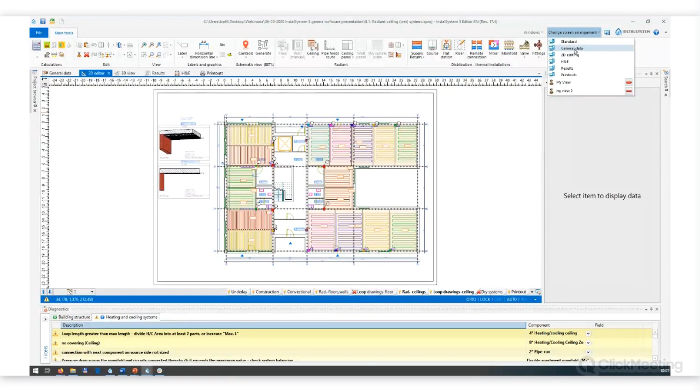To improve comfort and efficiency of your work, you can quickly change the configuration of windows visible on the screen. Now we can see some standard configuration. If you choose any other of them, you will see a different configuration. Now we can see general data, then we can switch to 2D editing. You will see a 2D view and also a 3D view. Next, for example, results. The list of predefined configurations corresponds to subsequent stages of project implementation.

You may use one of these configurations, but you may also create your own. Let's change one of these configurations and save it. I will close the data table, and I will move the 3D view to the right side of the screen, like this. Now I will save it by clicking on this button. Name it 2D and 3D view. And it's been saved here in the list of my compositions.

Okay, so let's take a look now at the top of the screen. You can see the ribbon with many icons. When I switch from one edit scope to another one, the contents of the ribbon adapts to the currently edited project scope.

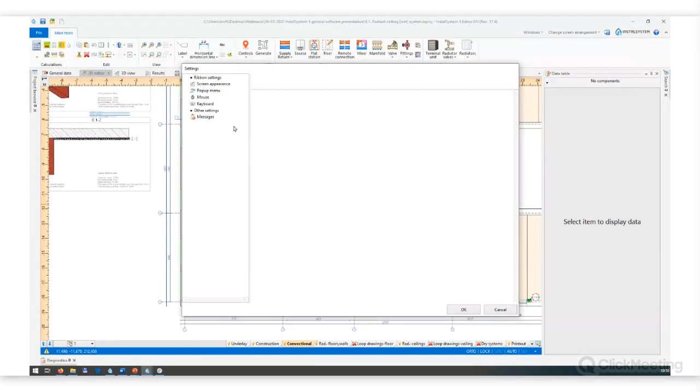Okay, the next feature: all the windows are interactively linked. When you browse something, let's change the configuration. And when you click on some of the elements with the right mouse button, there will be a function find in active windows.

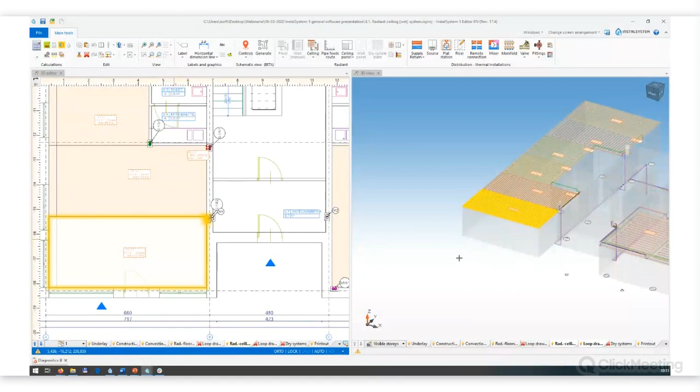It's very useful at different stages of project implementation. When you analyze the diagnostic messages and you want to find the element in a 2D or 3D view. When you analyze also the results, or you want to just find an element from the 2D view on the 3D view.

That's all at the beginning about the interface. We'll use the program in practice training a little bit later. So let's go to the next point.

Integration of all modules in one application. Now I will use another example with flat stations. This one. And show you also a short page. Sorry, not this one. This one. Okay.

If you know version 4, you surely know that there we had different applications: Install Heat and Energy, which was for heat loss calculations. We had InstalTherm HCR for heating and cooling installations. We had InstalSan for tap water and sewage systems. And we had Install Mat for processing the list of materials.

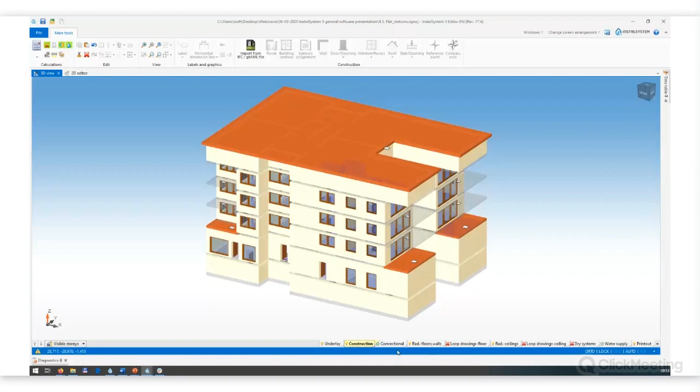First of all, you can make in one project all the installations without the necessity of switching between different programs. It saves time at many stages of project implementation. For example, it eliminates double import of underlay, or double creation of building structure, or double preparation of printouts.

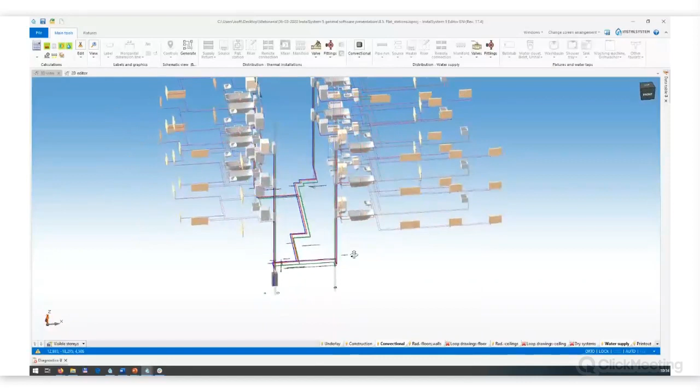Also, you can quite easily find the collisions between the installations, because you have full control of the model of the installation on 2D and 3D view. And also, because of the integration of all modules, we could introduce flat stations into the program. About flat stations, I will tell you more in the second part of today's meeting. Okay, so let's go to the next point.

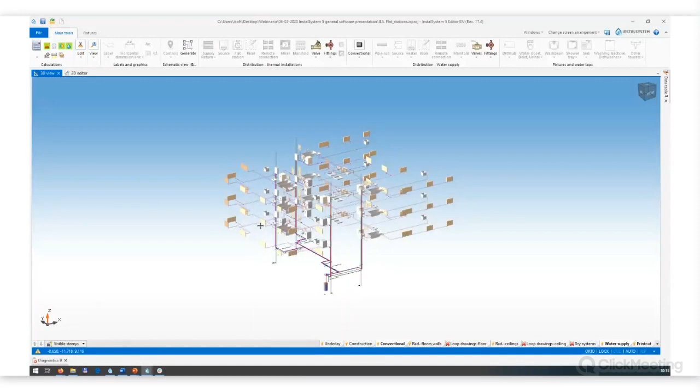3D view for better control of the building model and installation model. Once again, we are in the same project. Generally, in version 5, similarly to version 4, we create the installation on plan views. So we create an appropriate number of levels, and then we draw the installation.

But additionally, we have a 3D view, and it gives us a great tool for diagnosis and control of the model of the installation. With the use of available functions, you may flexibly control the scope presented on the 3D view. For example, we may hide some stories. Let's leave just one. We may also hide all walls. On the right mouse button, there is a function: hide all walls in 3D view.

Or we may hide just some walls, not all of them, just to look inside some room. And we can also precisely control the scope of presented installations. Let me display once again the whole building.

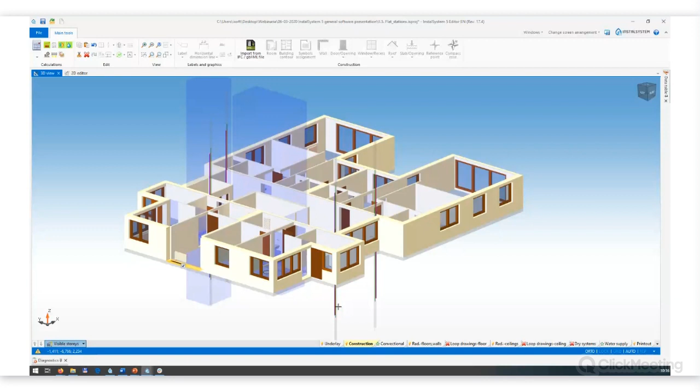And now when I switch to convectional, for example, you will see just the radiators, the flat stations, risers, so the heating installation. When I click to water supply system, you will see hot and cold water installation.

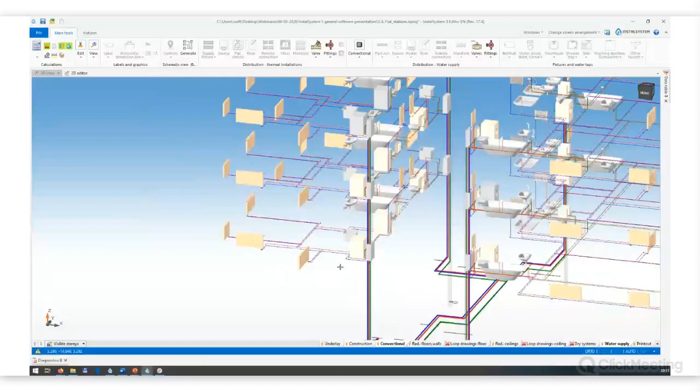I may also select by holding Control key and clicking with mouse on two scopes. I may display, like in this case, heating installation, hot and cold water installation at the same time. Okay, so it's the 3D view. Another point.

Rearrangement and optimization of general data window. We may use the same project file, and let's open the general data. Okay. All the tabs have been rearranged and optimized. All the project and calculation options have been combined and grouped into these intuitive tabs.

A list of visible tabs in the general data depends on the project scope. So depending what applications are switched on, we can see different contents of the tree in the general data. Maybe let's take a look on the thermal systems and ceiling systems, one of the examples. You can see that this tab has been divided into structural parameters and operating parameters.

So if you change anything from this data part, you may expect that they will somehow affect the change of the construction of the ceiling system. If you change anything from operating parameters, you may expect change in the flows, in the pressure drop, so generally in the operating parameters.

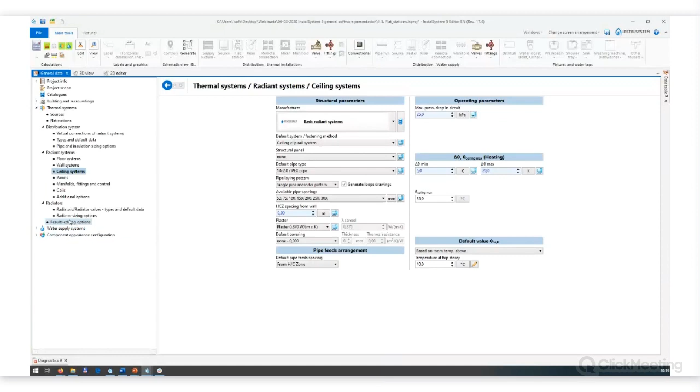When we click to radiators, you will find their default radiator type, connection, fittings. So all the settings associated with the radiators were grouped on one tab.

Another feature is the possibility to display in many places additional graphical and text information about the products. When you select the system or some element of the installation, you may take a look on it. If there is additional information available on the web page of the producer, you may also display that information. This is link to the website.

And the pictures may be also displayed in the bill of materials. So when you print the bill of materials, it may include also the pictures and some additional text.

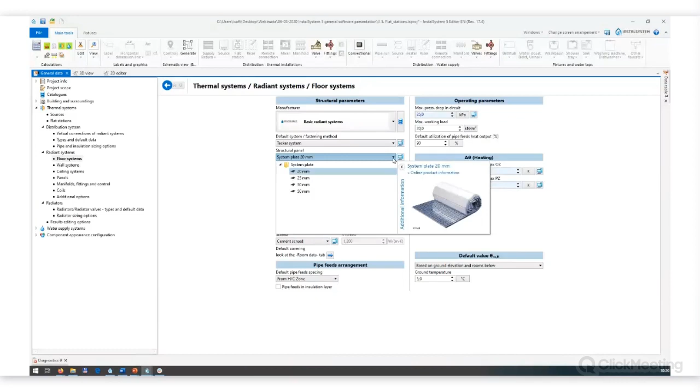Another useful improvement are the catalog filters. Instead of one window, we have many different filters. And if you want to find some particular catalog, you may use one of these filters. Or you may use also the text field below by typing some letters. You may filter the list of presented databases.

And we can also limit the list of presented databases only to producers databases or to neutral, and something that is dedicated to the German and Austrian market, to VDI databases. Let's take a look on one of the tabs. There are also very useful buttons like this one. You may find them in many places.

And if you want to use, like in this case, some thermostatic valve, but you forgot to import the proper database to the project, you may click on this button. You will be switched to catalogs window. And when you choose the proper filter and load the proper catalog, then you may click on this back button and you will be again on the proper tab of general data.

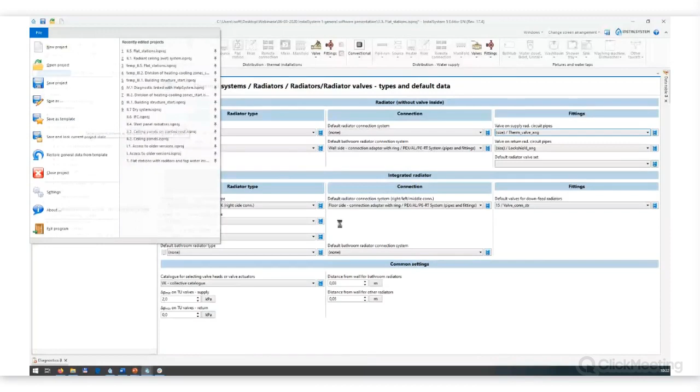By preparation of a proper list of typical project templates with typical settings, for most frequently made projects, you will avoid the necessity of making the same steps when working on next projects. If you open the new project now, you will find that new template in the list. Okay, next point.

Easy and quick access to older versions of the program. In version 5, we have created a new and sophisticated update system, which gives you access to the newest and older versions of the program. Let me use one of the projects. And when you click on it in the package manager and click edit, you will see some dialog window.

In the first phase of opening the project file, the program detects the version in which it was saved last time, and by choosing the latest, the newest version, or the older one, you have full control over the state of the application itself and the product databases that will be used in the project.

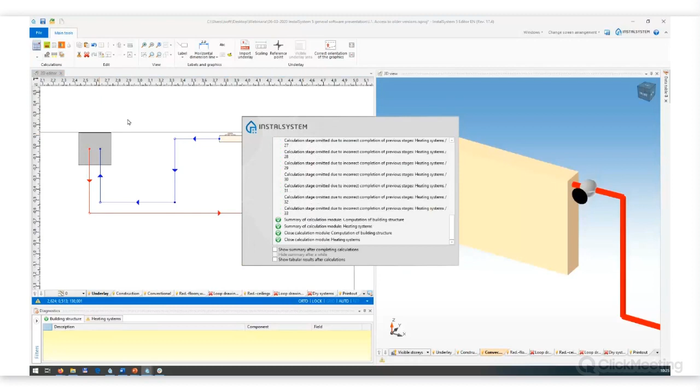I think this is that one. Very simple: one radiator, one thermostatic valve. And just imagine that you did that project on one of the previous versions. You updated the program, you open it, and you want to calculate it. You click on the calculations button, and you get that message.

Valve type not specified, valve type not in the catalog. I suppose that you could meet that situation with version 4. It happens when the producer of a particular valve or radiator or any other element of the installation changes the assortment, we change the database, and we delete the item from the catalog. With version 4, what we usually proposed was to replace the valve, in this case, with the new product.

But it was not, in many cases, the right solution, because if the installation was running or if it was partly made, in some cases you couldn't replace the product. In version 5, we have completely resolved the problem, because if you open the project, let me display it once again, saved on one of the previous versions. In this case, the program detected that this project file has been saved in version 17.0. And I may choose open in the compatible version.

So in this case, the program would open the project file in version 17.0, or you may open it in the newest version. If you open it in the older version, you will be able to calculate the project with the old databases. So generally, this way we have eliminated the problem with lack of access to products that were withdrawn from libraries as a result of changes in the producer's portfolio.

New modules, new installations, and new elements. The first new module, Radiant Cooling Systems. Again, I will find the proper project. This one. Okay. The module for designing cooling systems was already available in version 4, but it was limited to convection systems. Version 5, as you can see on this project, has been extended by the possibility of designing radiant cooling systems located on floors, walls, or ceilings.

In this particular project file, you can see the ceiling system with the pipes fastened, maybe let's take a look here, by rails to the ceiling and covered with wet plaster. Manifolds are on the story above. The pipes go down to the story below, and they supply the ceiling systems.

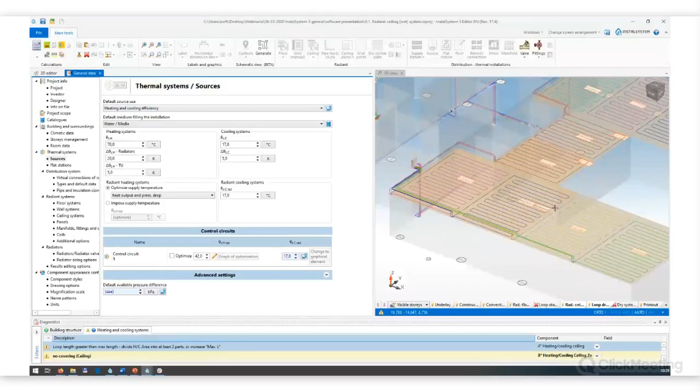The results you may check in hints, for example. There is a lot of information displayed in the hints. And there are also result tables dedicated for cooling systems. The whole group of tabs, results cooling, and for example, general results, where you can check the supply and return temperature, total output, and we can also browse detailed results for each circuit on the ceiling.

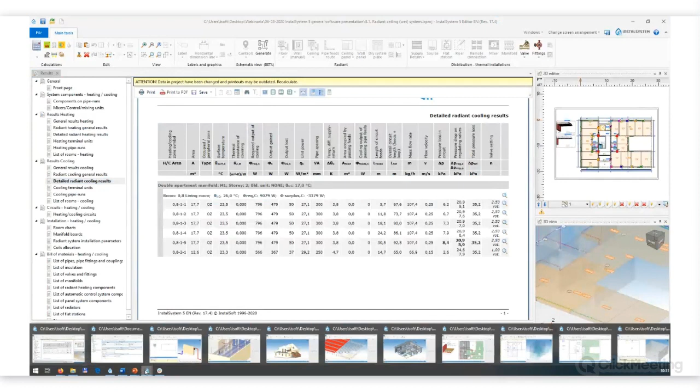This was the first new module. The next one is the wall and ceiling panels. And we will use another example. It's somewhere here. Okay. You can see some ceiling panels.

These radiant systems are becoming more and more popular for a few reasons. First, they are quite easy to assemble on the ceiling. They've also got lower thermal inertia compared to traditional wet surface systems, like the previous one. They are lighter, and also their prices are lower than a few years ago. These panels can be applied in both heating and cooling systems, and their output is calculated according to European standards.

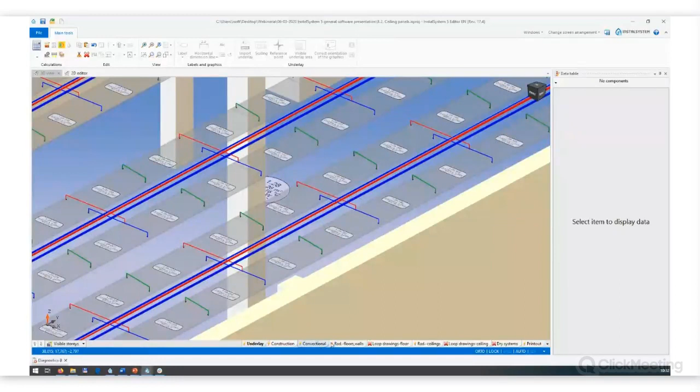We may select one of the panels. You will see data in a data table. And as you can see here, there is the delta T of this panel. The program optimizes the flow through each panel, or like in this case, through a set of panels connected in series, in order to obtain the required heating or cooling output.

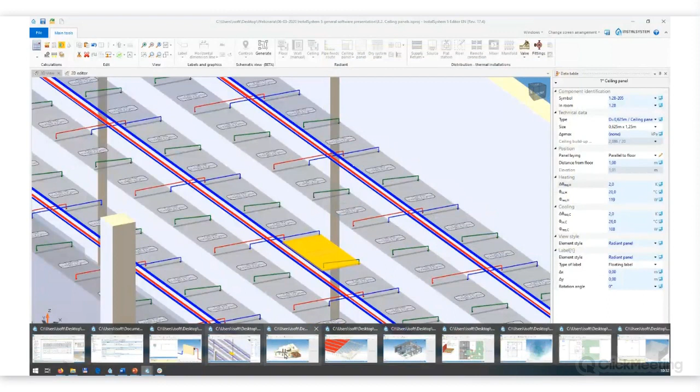And similarly, the results you may browse in the hints or in the result tables. And I have also another example here of ceiling panels. Quite interesting one.

This solution is more often practiced in the attics. As you can see, the panels are mounted on the slanted roof. So in case of adaptation of attics to residential purposes, you may also make that kind of installation. And if you take a look at the pipes, they can be also arranged at any angle, not only vertically or horizontally. Okay.

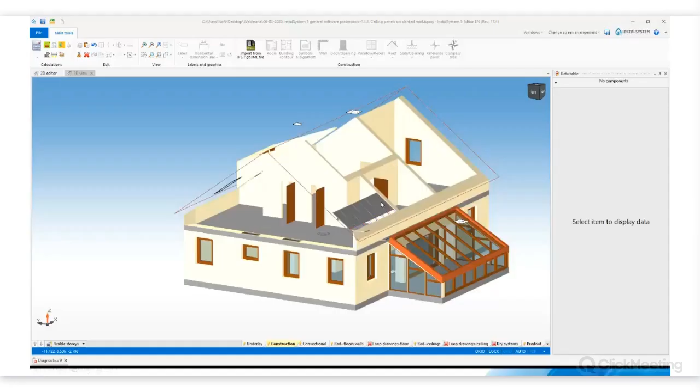Another element, new element of the installation, suspended steel radiators. So once again, another project. They are similar to panel systems, but they are dedicated, as you can see, for larger objects like halls, warehouses, gyms, ice rinks, and so on. Standardly applied in large objects, air heating systems with fan coils and air heaters are increasingly being replaced with this kind of water radiation systems.

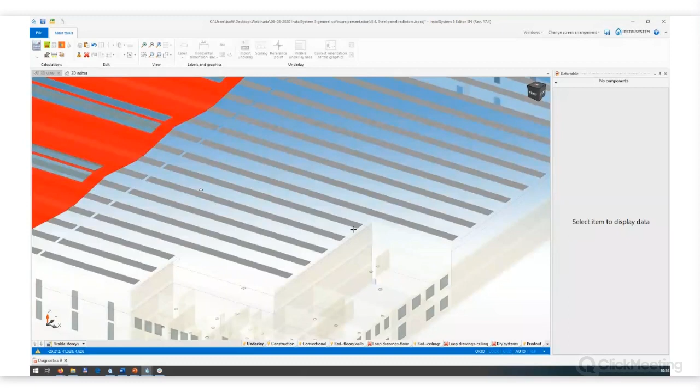Well, generally, as you supposedly know, common advantage of radiation system is the possibility of lowering the internal temperature without losing comfort. It brings energy savings and lower cost of heating. These long rows of panels, in fact, they consist of some basic elements connected in series. And as you can see, they are connected to the distribution network, in this case in Tichelmann mode.

So the automatically created bill of materials includes all basic panels of different lengths, fittings to connect them, but also all items required to hang the panels under the ceiling. So some hooks, some chains, screws, etc.

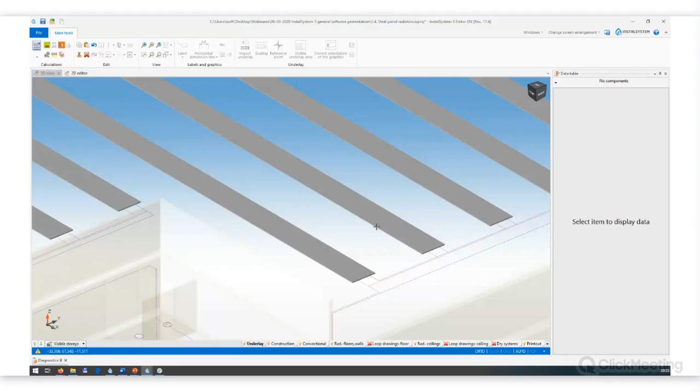Arrangement of these panels on the ceiling is facilitated by a new tool. This tool you will find here. It's called, I must switch to 2D view. It's called Zone of Ceiling Panels, but about this tool I will tell you more, and I will show you how it works in the third part of today's meeting. Okay, so

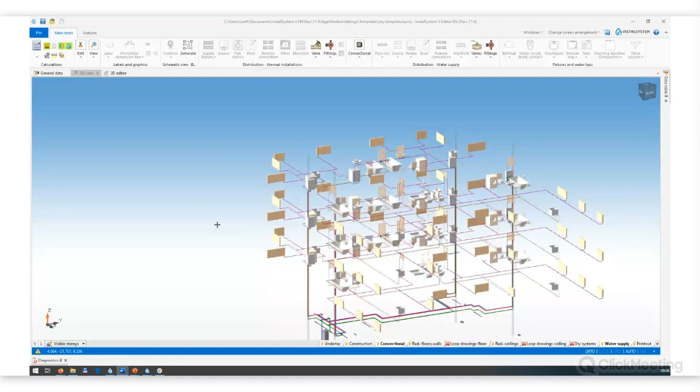Another new module, flat stations. We're back in the program, and once again I will display that project file with the flat stations. I think it was that one. Yes. Sorry. Okay. And maybe let's display just the convectional systems. This is flat station here on the riser. Here, here, and here. Got many more.

In technical literature, you may find different names for these devices. Flat stations or apartment stations or residential district heating stations. Generally, as you can see, they are used for individual domestic hot water preparation and to supply heat to the heating installations in the apartments. As I said before, thanks to the integration of all calculation modules, you can design in one project both heating installation and tap water installation supplied by flat station.

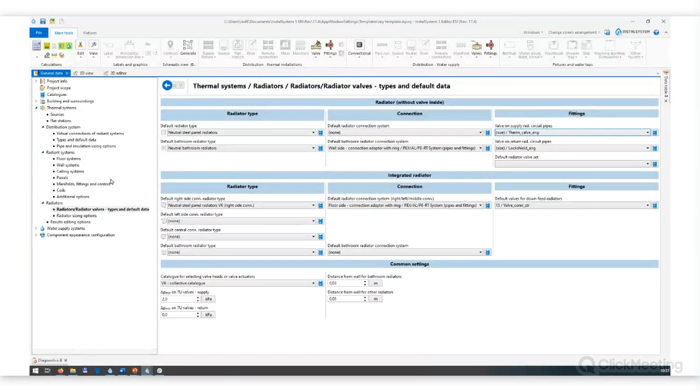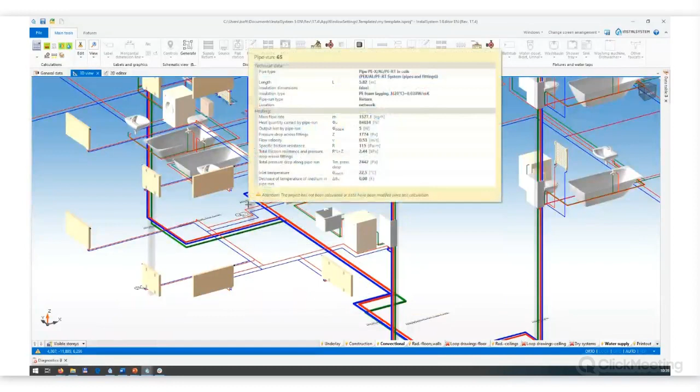The calculations also include the aspect of non-simultaneous operation of flat stations in hot water heating mode. This aspect has crucial impact on sizing pipes, these riser pipes and pipes in the primary network, on the output of the heat source, and also on the buffer tank capacity.

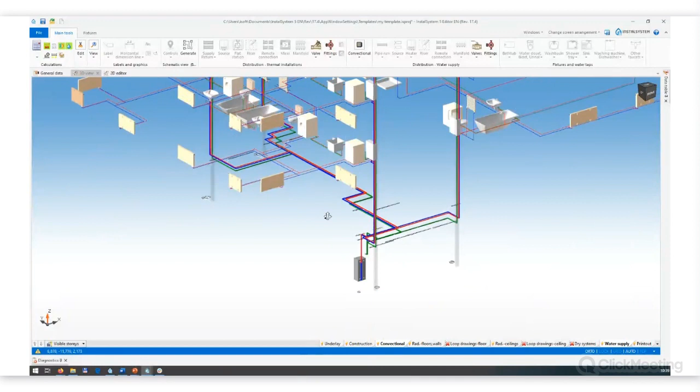We can also use hints. They include much precious information about flat station, about the parameters in hot water preparation mode, in the heating mode. You will also find some information about some additional accessories in the flat station. And of course, you will find the flat stations and all the accessories in the list of materials. Okay.

Another module, BIM, GBXML, and IFC Import prototype. I have another project, this one. GBXML and IFC are BIM open standards. InstalSystem 5 currently allows you to import building model from GBXML or IFC formats in scope of building elements like,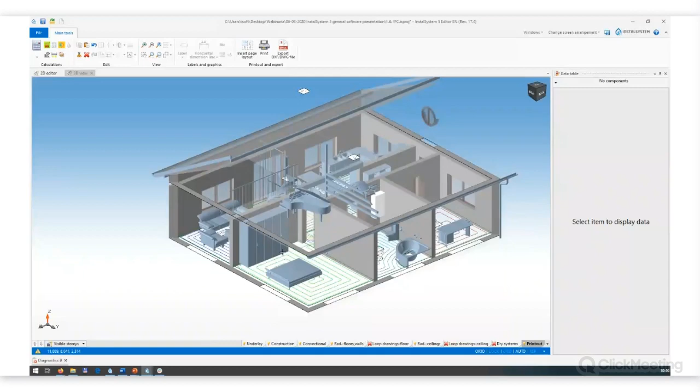let's click here, like walls, windows, doors, but also other building standard equipment, like you can see in this case, some furniture, table, toilet, wash basin, bathtub, also the kitchen cabinets.

Stairs. So also other elements that are maybe not so important when you design the installation, but in some cases their visibility can be useful. Like in this case, when we see the kitchen cabinets, we may properly design the underfloor heating system. And that's what we did with this project.

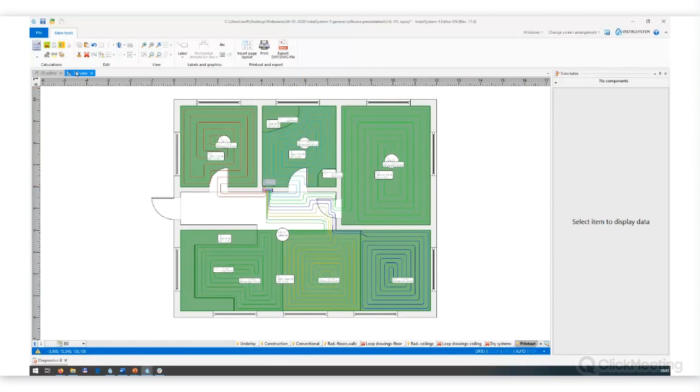On the model of this building, probably it was from an IFC file, we designed an underfloor heating installation. And next, you may print 2D views and 3D views, or you may export it to PDF. But currently, you cannot export the model of the installation back to an IFC file. And that's one of our main aims for this year, to implement export of the installation made in version 5 to IFC.

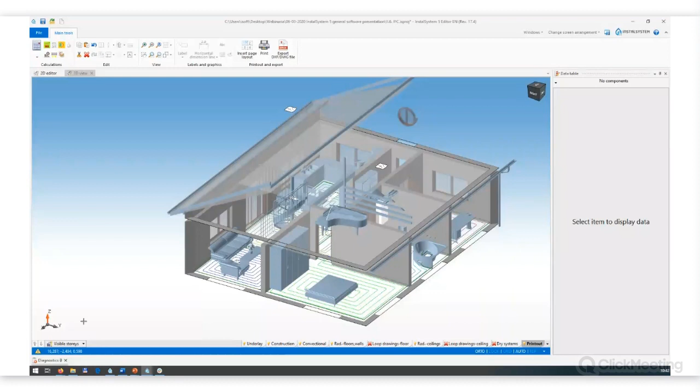Okay, and the last new module I would like to show you today is the dry system board arrangement. Another example, another project. This one. Dry systems for underfloor heating were already supported by the previous generation of InstalSystem package, but version 5 offers a new module for manual arrangement of dry system boards. This is the 2D view, and that's how it looks in the 3D view.

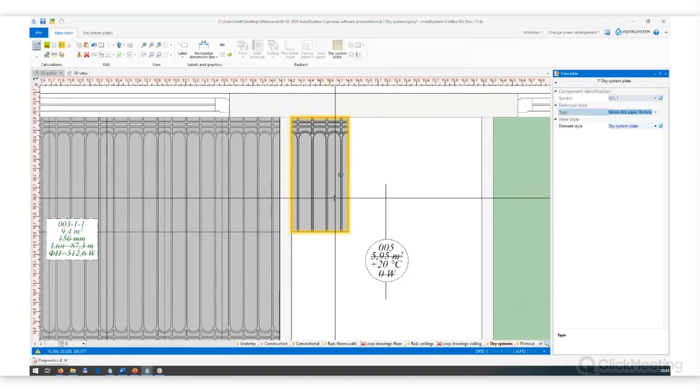There is some extra edit scope for dry systems, and by picking the dry system plate icon and choosing some type from the catalog, you may arrange by yourself the plates, the boards, one by one, by copying, changing the snap point with the tab key. And so generally you can arrange the boards manually. They will be trimmed to the edge of the room. And when it's done, also manually you can lay the pipe into the grooves.

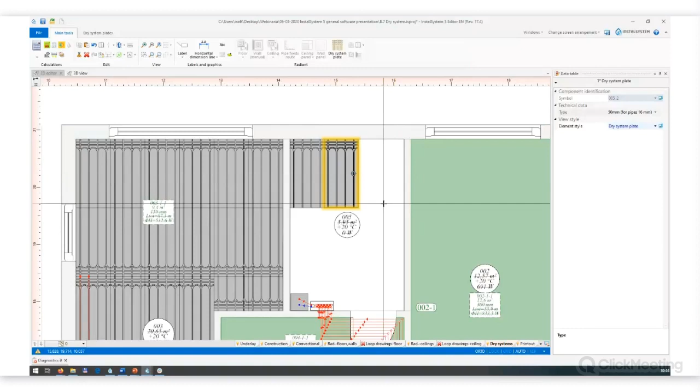So it's quite an opposite approach to the designing process, because in a standard way we just indicate, like in this case, the floor. The program calculates the required pipe spacing, and in this case we do it manually. We arrange the floor, the program takes it as input data, and using this data calculates the flows.

Okay, so yeah, there is one more new module, tap water extensions, but I don't have any project to show you it, but I have a new page to explain what it is for. Tap water extension. This module provides additional advanced features, calculations of residential ring installations, and calculations of hot water inflow time to indicated water outflow points. The criteria are based on VDI and DIN standards, so on German standards, and this new module was dedicated to the German and Austrian market, but you can also use it in other markets.

Okay, so conclusion, what modules are available in InstalSystem 5? Let's take a look one by one. First, we've got the base module, GBXML and IFC import, prototype, material list processing, heat loss calculations, heating systems, convective radiator sizing, cooling systems, radiant loop systems on floors, walls, and ceilings, dry system boards arrangement, radiant panel systems, hydraulic control loops. I didn't present it today, but it was also available in version 4. This is an advanced module for balancing cooling and heating systems, flat stations, and tap water systems. And the last one, tap water extensions.

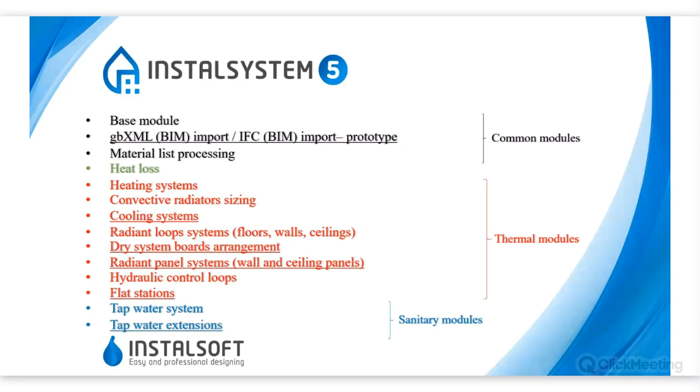So now that you know what modules are available, you probably wonder what will be next, what modules are under preparation. And here's the list of modules we are working on, and we want to release them in 2020. The first one, BIM interface. Like I mentioned, at the moment, you can only import the building in scope of some elements from IFC or GBXML. And with this module, you will also be able to export the model of the installation made in InstalSystem 5 to IFC. Sewage systems, we are also working on it. And something dedicated for the Polish market, building energy certificates. These are the main 3 projects we run at the moment, but we also make some smaller or bigger improvements of all the existing modules.

Okay, so this is the end of part 2. Let me check once again if there are any questions. I don't see any message from Rafał, so I suppose that he probably answered your questions directly in private windows.

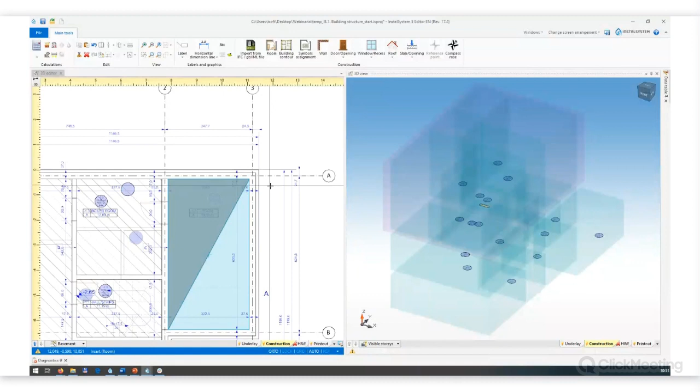And I have left just one in the basement to show you how quickly you can draw in version 5 rectangular rooms. I click on the room icon and choose one of the inside corners, click on it, and instead of clicking on all the corners, I use the opposite one, this one, click here, and with right mouse button I finish. So instead of 4 clicks, I may do just 2.

There are all rooms on the drawing, but next I have to also draw the contour of the building. This is building contour. I will draw it using the external walls and the corners of the building, like this. And now it's done. If the building contour, like in this case, has the same shape, you may draw it once on one of the levels and extend it on many levels.

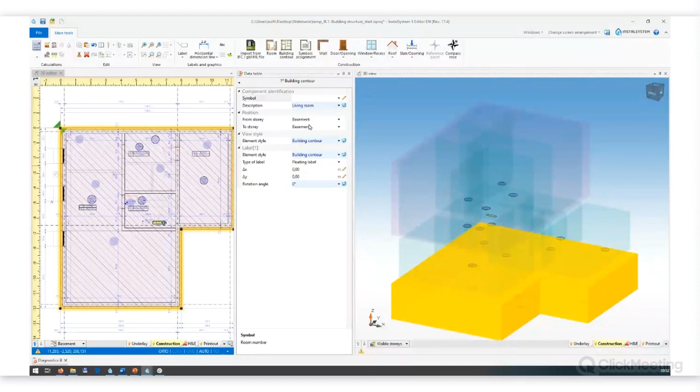When it's selected, we will display data table. And you can see that there is a position from story basement to story, and I will change it to ground floor. And it's been automatically extended to the next level. Let me hide it again. Okay, so we have rooms. We have also building contour. So in the next step, we can use this function: generate walls and slabs from rooms and building contour.

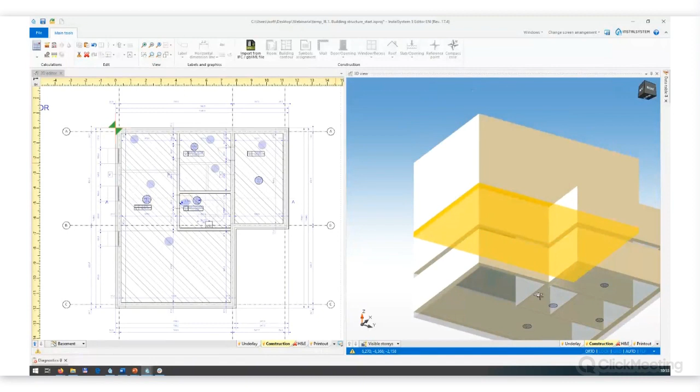When I click on it, on 3D view, you will see the effects. We can see the walls. Similar function was also available in version 4, but in version 5, not only the walls are recognized, also slabs between stories and also floors. So there is no need to put the floors inside each room one by one, what we had to do with version 4, because slabs and floors are created automatically.

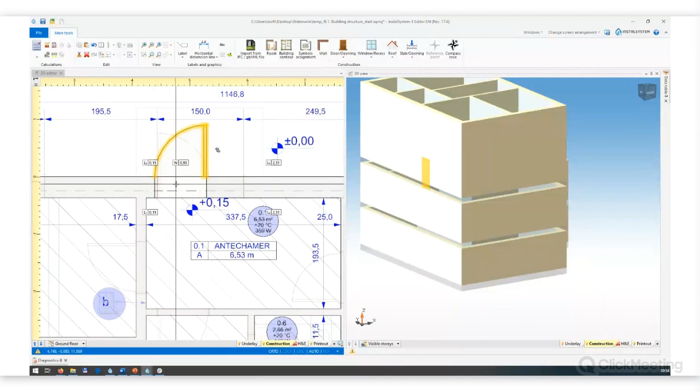Okay, to complete this building structure, we should introduce at least one door and one window. So let's do it right now. I will go to the ground floor and I will put external door. We may easily change the size. We may move it from the left to the right. I may change, for example, percentage of opening. We may introduce 2 wings. So generally, we have a better control on the graphical presentation of doors.

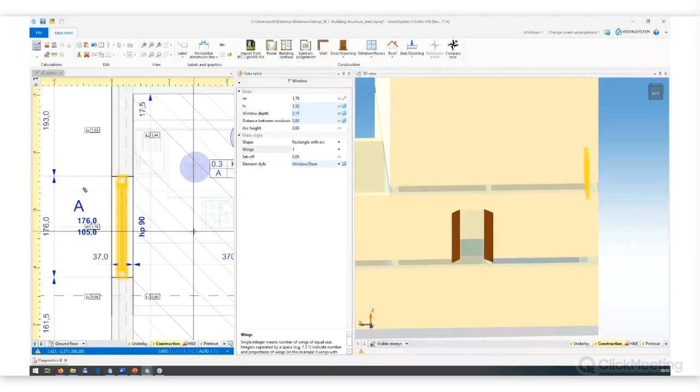And similar with windows. Let me introduce one window right here. I will change also the size, and change the graphical presentation with 2 wings. But it could be also presented as a round or circle window. Or triangle. Okay. So we have one window, we have doors.

So now we should create the roof. And with version 5, we've got much more new possibilities of shaping the roof. First, we need that part over the garage. The garage is on the ground floor. And I will draw the roof like this. Also, just with 2 points, you can see it's flat.

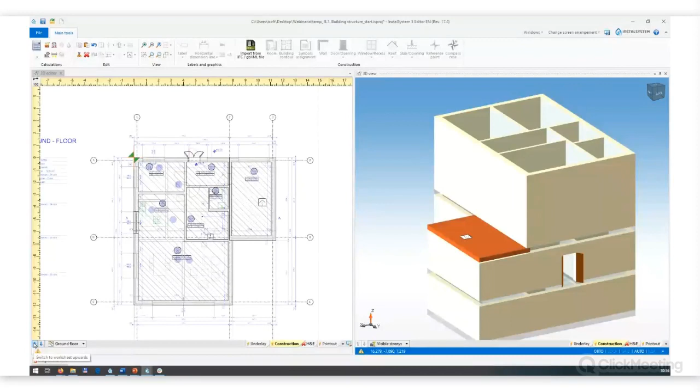And now I will introduce the roof on the upper level. And similarly, I will use just 2 points. Now it's also flat. But to show you how you can change the configuration of the roof, I will also introduce some edges and we will make some slight modifications. Add roof edge. This is the first one. I will add another one like this. And I will change the corners of the roof by lowering them.

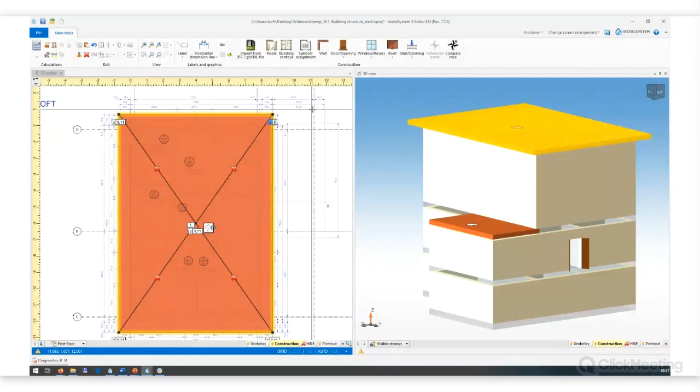Okay. Now it looks a little bit strange, but we may calculate this project in scope of computation of building structure. And it's been computed. You can see now the correct shape of the roof.

We could also introduce into the roof some other elements like the roof window or a dormer, but we will skip it. In our help system articles, you will find many more variants of the roofs, and I will show you later how to use the help system articles.

But let's assume that we have completed the building structure, and next we want to calculate heat losses. So we go to the next point, the whole phase of heat loss calculations.

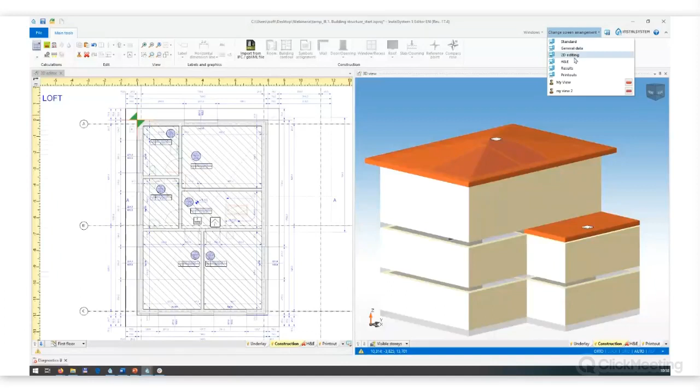Okay, so when the building structure is complete, in the next step we should define thermal parameters of all building elements. I will change the configuration of the screen to heat and energy.

And the definitions you can create similarly to version 4 from scratch by clicking on this button and adding and defining one by one all definitions. But you may also import ready definitions from other project file. That project file you can prepare earlier, or you may use some template with definitions.

Let me find the proper file. It's right here. I've prepared some special project. It contains only definitions of thermal partitions. You can see the list of definitions, and now you will find them right here.

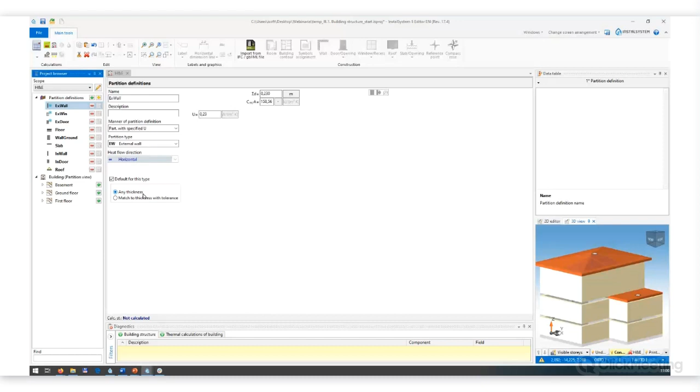Based on these definitions, the program will automatically assign heat transfer coefficient to graphical elements of appropriate type and thickness. Let's take maybe this external wall. There's a checkbox default for this type of any thickness. So if the program finds any external wall of any thickness, this definition with this heat transfer coefficient will be assigned.

So let's try to calculate this project. Now I will switch also thermal calculations of the building. Click on this button. And heat losses have been already calculated.

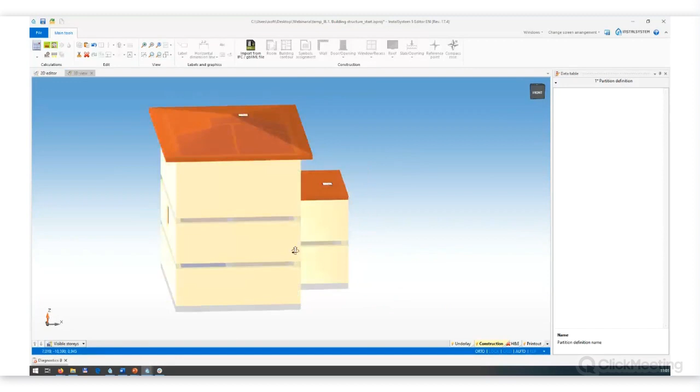And let's analyze this project, maybe I will use this composition. Let's take a look first on 3D view. There is construction, but now if we switch to heat and energy scope and display it, you will find all thermal partitions created automatically on the base of this construction.

When I click here and click on some of the elements, for example a wall, you will find its properties in the data table on the right side, also the U value. And if you take a look on this part, there is a wall, and it's been automatically divided into two thermal partitions.

This is because this room is partly under the ground. So the program automatically detects what part of the wall is under the ground and automatically divides it into separate partitions.

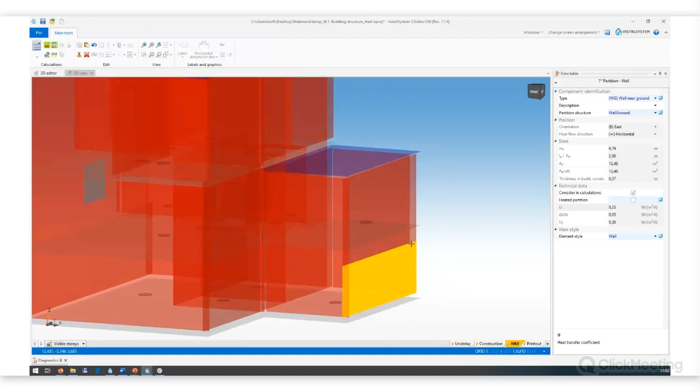And if you take a look now also on the floor, let's do it like this. Okay, now we can see the floor. On the construction tab, we can see one big slab covering the entire story.

On this tab, you will find many different partitions. So it means the program during calculations divided the whole slab into parts to properly calculate heat losses.

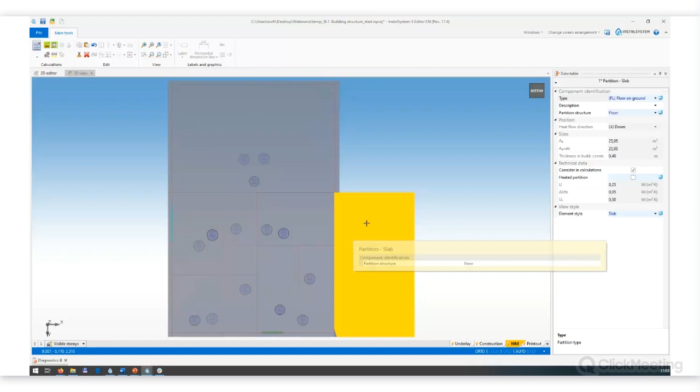And you can also check the result tables. Results for building, list of rooms, room parameters, and so on.

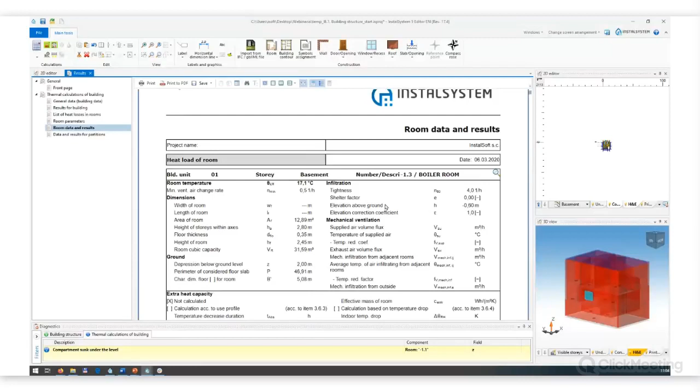So, summarizing that phase, I hope that you could find out how quickly you may design, calculate the heat losses, and create the building structure. We will go now to a different module, radiant loop systems, and there are three new features.

Automatic division of heating cooling zones into the required number of circuits, automatic pipe feeds drawings between manifold and heating cooling zones, and finally automatic pipe loops drawings.

Another example, it's right here. As you can see, this is a bigger object, probably some store. In case of underfloor or wall or ceiling systems in larger objects, to obtain pressure loss and loop length at an acceptable level, usually it is necessary to put several or sometimes even a dozen separate circuits in the room.

In version 4, usually after first calculations for some heating floors, we received an error about exceeded pressure loss or exceeded maximum length of the pipe. And in this case, we usually had to manually divide the heating floors into parts, once again draw the pipe feeds to connect it. So generally, it was time consuming.

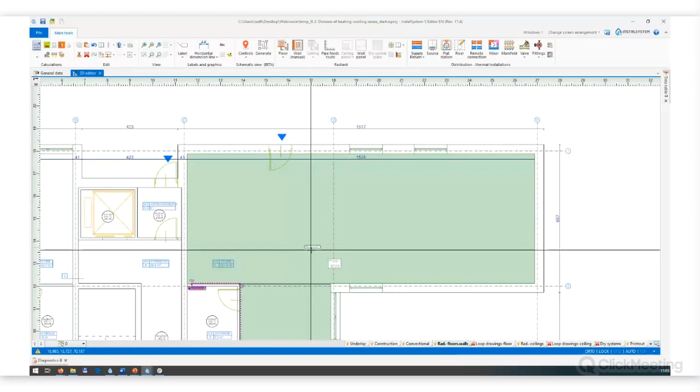In version 5, heating floors have been replaced by an element which is called heating cooling zone.

This zone may be automatically divided into the required number of circuits if either the allowable pressure drop is exceeded. There you can see the data of this heating cooling zone, and there we can see the maximum pressure loss. So if this value is exceeded, the program will automatically divide it into more circuits. Or if the maximum pipe length is exceeded, it will also be divided.

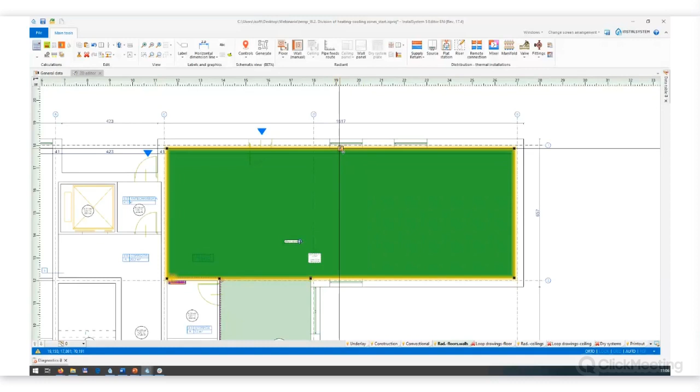With this element, we may also control the direction of division lines. There are some scissors on the edge of the room. I may move it from one edge to another edge, and this way I indicate, if it is necessary to divide this heating cooling zone, what should be the direction of the division lines.

Another feature is the automatically generated pipe feeds between the manifold and all the heating floors. In version 5, there is no need to draw directly all the pipe feeds between the manifold and the heating floors. It will be done automatically after indicating the route between the manifold and zones. We've got a new tool, it's called pipe feeds route.

There you can see the first section of the pipe feeds route. It connects the manifold with the first zone. Then it goes to the right and connects the second zone there. And then it goes down to the third zone.

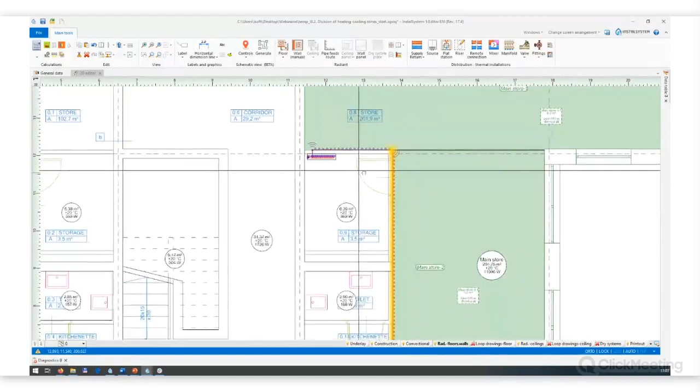You can see some arrows here. They indicate on what side of this line the pipe feeds between the manifold and the heating cooling zones will be drawn.

Okay, so I told you how it should work, but now let's take a look at how it works. Let's calculate this project. And now you can see the effects.

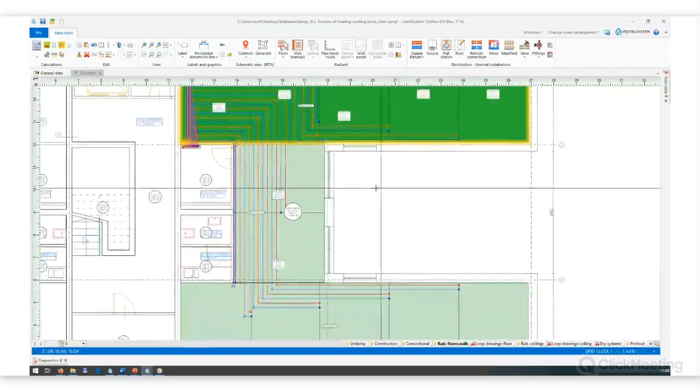This one big zone has been divided into 1, 2, 3, 4, 5 circuits. This one into 2 circuits, and this one also 1, 2, 3, 4, 5.

And there you can see the pipe feeds generated from the pipe feeds route. They go to each heating floor with the appropriate spacing between them. That was really hard to obtain in version 4, because you didn't have any special tool for maintaining the same space between the pipes.

Okay, but there is still something missing. We cannot see the pipe loops inside the floors, but we will see them soon. I will switch back to general data, and on the floor systems tab, there's a checkbox, Generate loops drawings.

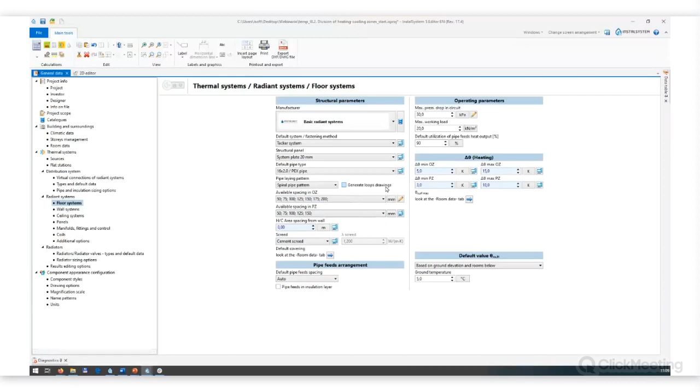When I click here and calculate the project again, you will see the effect. Now we can see the pipe feeds, and we can see the pipe loops in different colors.

And if any corrections in the project result in a change of the required number of circuits, or the distance between the pipe feeds, or a different loops arrangement, they will be automatically applied in the project.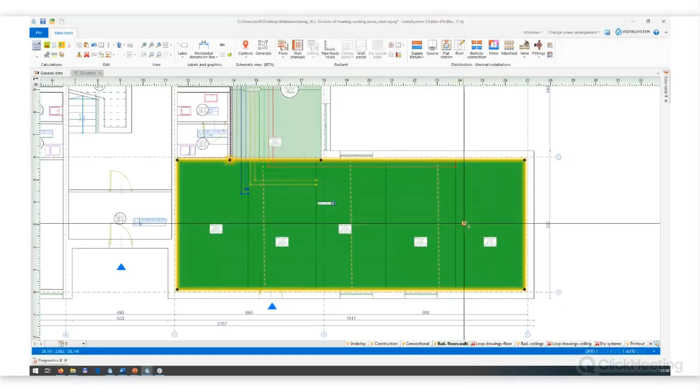Let's make some slight modification. For this heating cooling zone, I will change the orientation of the division line. It will not be vertical, I will do it like this. And now calculate it again.

Okay, and now you can see the difference. So if you change anything in the project and you calculate it, you may expect some changes also on the drawing.

Okay, so we go to another point, another module. And this is something we've been working very hard on for the last couple of months, automatic creation of schematic views of the installation.

Once again, we will use that project file with flat stations. It's here, and we've got a 3D view, we've got 2D views. And now let's imagine that I would like to also present this installation on a schematic view. How can you do it?

You can do it just in a few clicks. I will generate the schematic view of the whole installation. So I will find the heat source in the basement. And there in the ribbon, we've got schematic view.

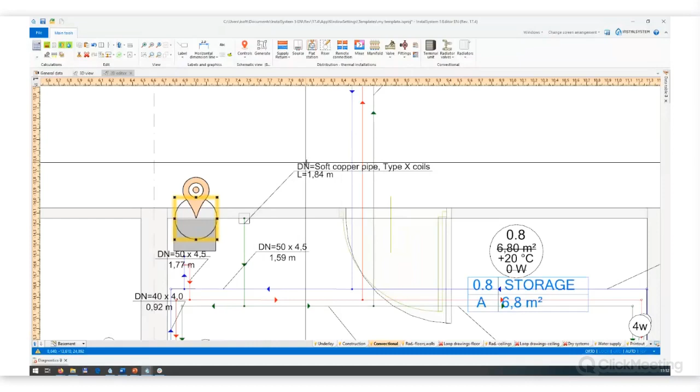And there is a starting point. I will put it directly on the source and introduce some symbol. And after that, I may just click this button, Generate. It will take a few seconds.

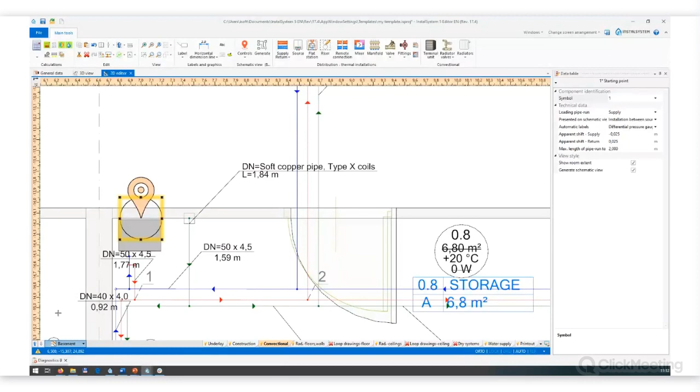It's already done. And now if you display this window, you will see the building with the plan views, but also below there is a new position with the symbol I've just entered, 1. When I click on it, you will see the schematic view.

Now it contains the whole installation directly from the source to all the risers and all the elements of the heating installation.

But we may flexibly control what scope is generated and, for example, what labels are automatically added to the schematic view.

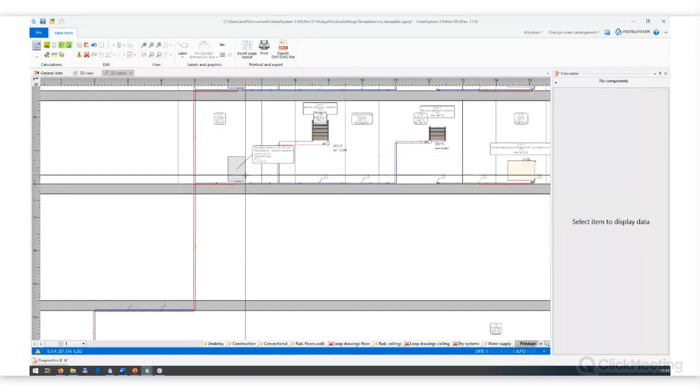We've got here flat stations, and usually when we provide a schematic view for the flat stations, it doesn't present all the heating installation that is behind the flat station. And I will show you how to change the configuration of the schematic view.

I will click on the starting point, and in the data table there are some fields, and there is a field, presented on schematic view. I will uncheck that option, installation behind flat stations, and click once again Generate.

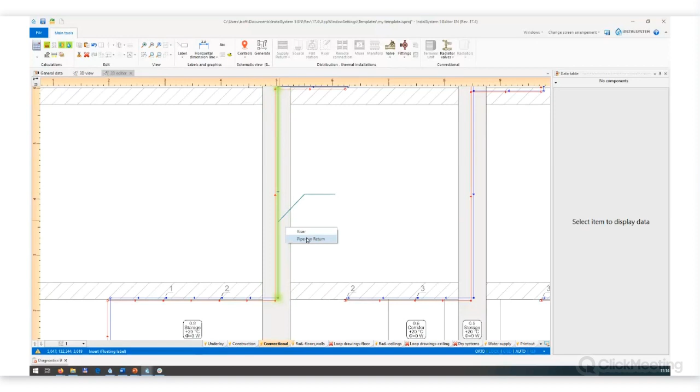And now you will see the difference. We've got just the risers and the flat stations. We can also add labels for the pipes. We could also add some balancing valves. So you cannot design the installation directly on schematic views, but if it's generated from the 3D model, you can make some modifications.

Okay, so we've got schematic views, and now they are available for heating and cooling applications, but in a coming update, you will also find schematic views for hot and cold water installations.

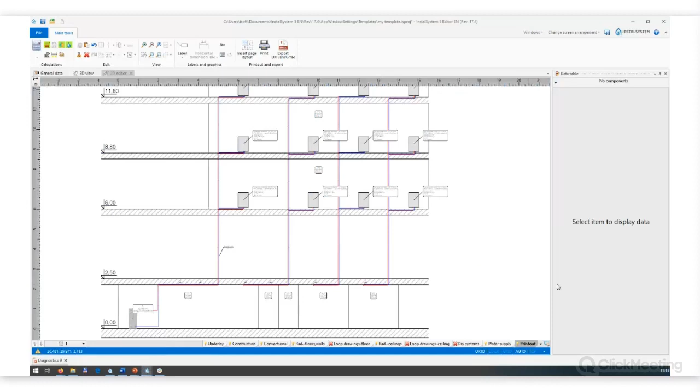The last point, radiant panel systems, automatic ceiling panel arrangement. Once again, I will choose that project file with the ceiling panels, this one. And now I will show you how you can quickly fill the space with ceiling panels. On the 2D editor.

I will switch to the second level, and you can see the existing panels. Now I will add another row of panels. First, I have to switch to radiant ceiling. And now there is an icon, ceiling panel, and I will choose zone of ceiling panels manual. And I will draw it just to cover some space, like this.

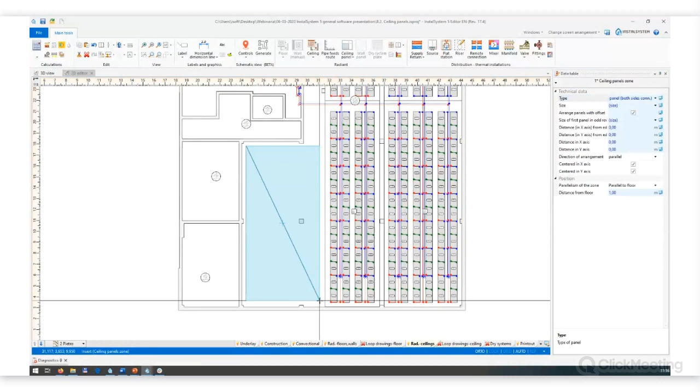And now I should set some parameters for the ceiling panel zone. Let me choose some options. I would like to have similar effects, so I will change the settings here.

Okay, and now if I click on this label with the right mouse button, there is a function, arrange the panels. When you click on it, after a few seconds you will see how the program fills the space of the zone with the panels.

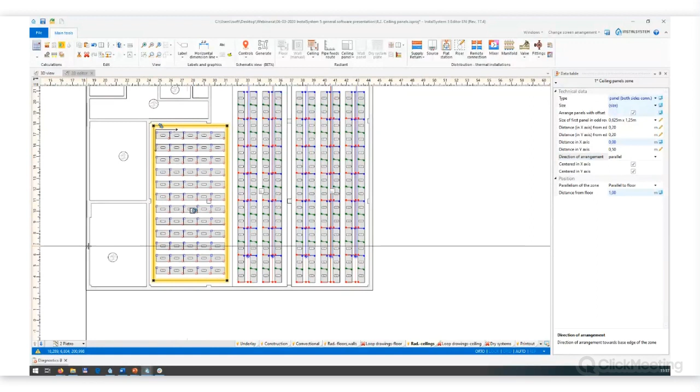At any time you can change the configuration and arrange again the set of panels. Let me introduce one of the changes and rearrange the panels. So if the effect doesn't meet your needs or requirements, you can change the parameters and arrange again the layout of the panels on the ceiling.

Okay, so that was the last point in this third part of today's meeting. Again, a short break for me and for you too.

I'm checking if I have a message from Rafał with questions. Okay, I have one question. Let me read it first, from Fedor.

When designing a system which will work in heating and cooling, which calculation is initial, heating or cooling? Can it be switched? In our practice, cooling is more demanding in terms of hydraulic calculations, so the calculation should start from cooling. Okay, so I will repeat it again, because I think I have already told you about this aspect, but let me first find the proper project file.

I don't remember which one it was. I think it was that one. Okay, so once again, if you want to design the installation with heating priority, in general data or for the source in the project, you should choose this option, heating, or this one.

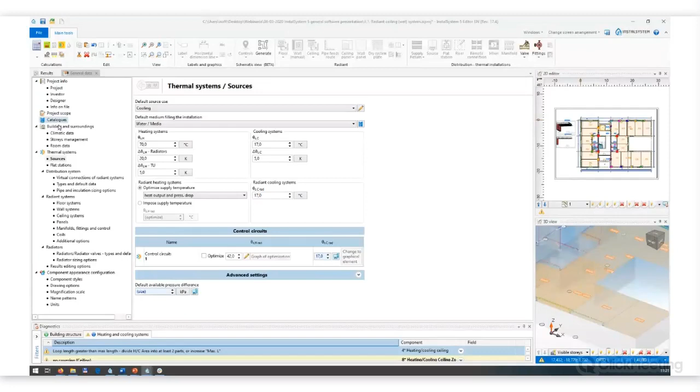Another question from Garrett: will version 5 have access to all manufacturers' catalogs? Well, if you have a full InstalSystem version, you have access to all the producers available in our software. You cannot import your own databases. There's a little bit of a difference in scope for the German market, because VDI databases are quite popular there, and if you use the German or Austrian version, you can also import databases prepared in the VDI standard.

Cooling panels. Sorry, let me read the question first.

There is a question from Fanil, but frankly speaking, I don't understand it. Maybe let me read it after the meeting, and I will answer you directly in the email. Okay, so these are all the questions I found in the list. So we can go to the last part. This will be the shortest one.

Better support of designers' work. New help system platform. So let me show you our help system platform. It's right here. It's available in a few languages, but the most complete is in Polish and English. In other languages, you may find only some of these articles translated. It's available on the website, but you can also open it from Package Manager. In the Package Manager, you have tab Help, and there is Help Online. Oops.

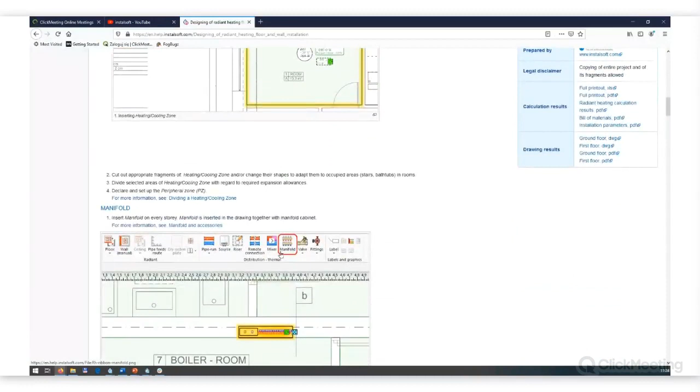On the right side, you will find contents, step by step, what you should do to design this type of installation. In some points, you will find screenshots. In others, you will also find some short tutorials from our YouTube channel. We update the contents of the help system continuously, so it's developed all the time. So first, when you want to learn the program, you should start with the help system, but you may also use our YouTube channel.

This is our channel. Now it's more focused on the Polish market, but you will also find more material translated into English. And this is a novelty released yesterday. For each publication, for each update, we will release a short video with information on what is new, what key features have been released. It's with a lecture, so let's maybe display it. You may find out very easily what's new in the program. Okay. So, new help system platform, new YouTube channel.

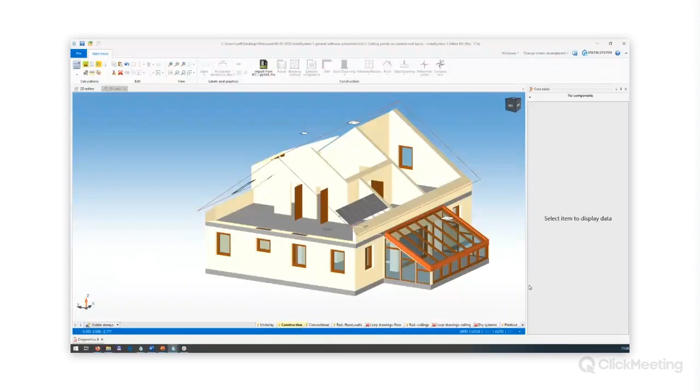The error report that you send directly from the Package Manager contains more information that we may use for analysis of the problem. Let me show you. Oh, maybe it's been closed, so I will not show you where the error report is, but you will find it in the Package Manager. And also diagnostic messages of typical problems are linked with help system articles. I will use once again one of the projects, but this is the last project for today's meeting.

I prepared it before the meeting, and this message you can see here, unbalanced circuit of terminal unit, is one of the most common messages you can see in our program in version 4 and in version 5. In this case, the reason is that there is no thermostatic valve on the pipe connected with the radiator, but there can also be other reasons for displaying the message, and we are not able to point out all the reasons in this short message.

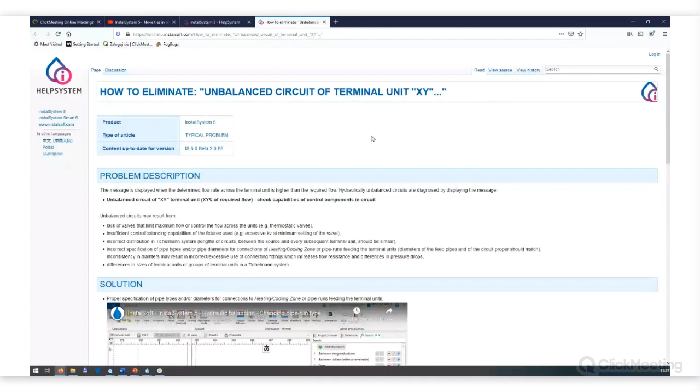So for this kind of message, on the right side in the last column you will find the button with a question mark. If you click on it, the program will automatically open the correct page of our help system article, where you will find more information on what could be the reason and how to solve that problem. So it's not available for all the messages, but for the most common or frequently appearing in the program. Okay, end of part 4, and we're close to the end of the meeting.

I will check once again the list of questions. No more questions. So we finally got to the end,

and some old people remember what Porky Pig used to say at the end of the cartoon. That's all, folks. That's all for today.